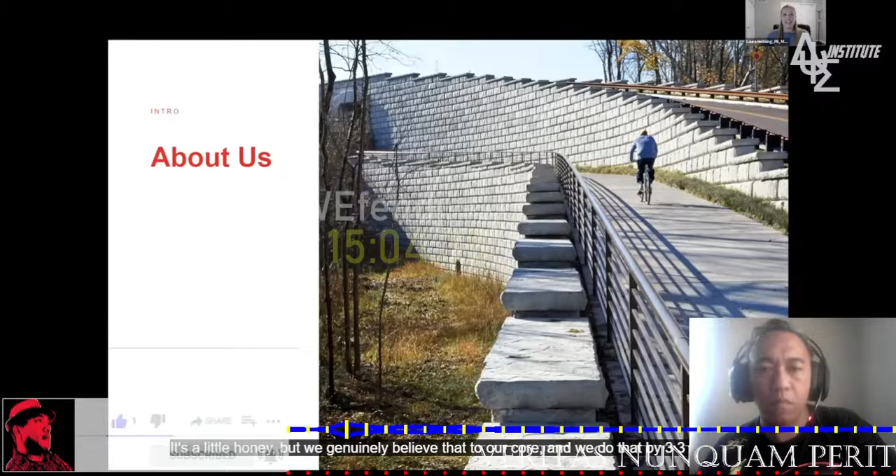About ReadyRock: our company motto is changing the world in concrete ways. It's a little punny, but we genuinely believe that to our core, and we do that in three ways. The first is taking time to care - we care about our customers, their projects, and their businesses. We lead the way by providing expert support and design resources for everyone. And we never give up by finding solutions for every project, no matter how big or small.

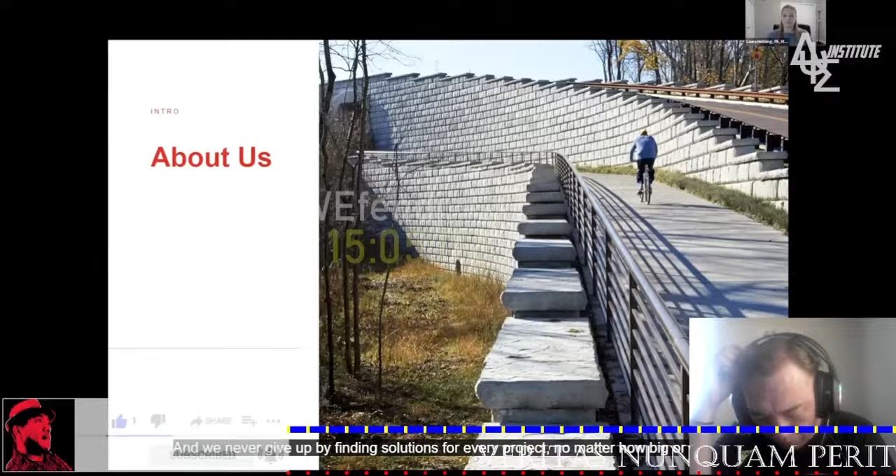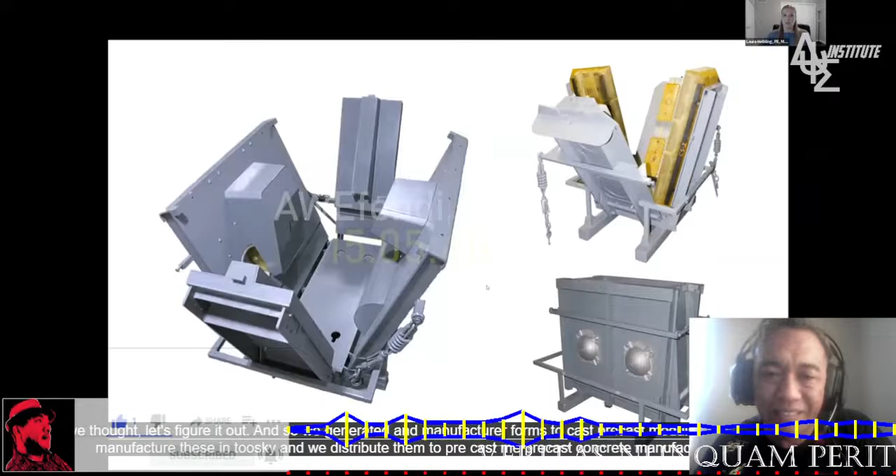We are headquartered in Petoskey, Michigan, which is pretty much as far north as you can get in Michigan before you reach the UP, and we were established in 2000. We actually started as a heavy construction company, and there was a need for retaining wall blocks, so we thought, let's figure it out. And so we generated and manufactured forms to precast modular blocks. We manufacture these in Petoskey, and we distribute them to precast concrete manufacturers around the world.

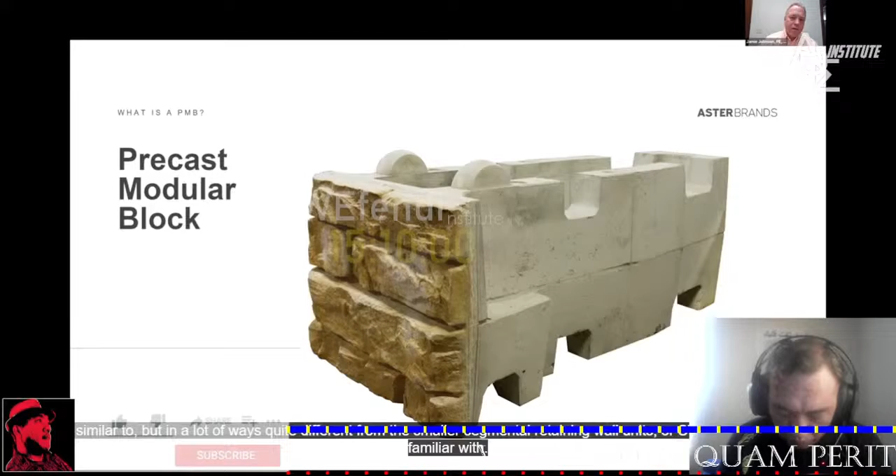Now I'll give you just a little bit of background. I'm sure there are several people on the webinar familiar with precast modular blocks, or PMBs, and there will probably be a few for whom this is one of the first times you've heard the term. What is a precast modular block? Essentially, it's a great big wet cast concrete retaining wall unit. They are similar to, but in a lot of ways quite different from, the smaller segmental retaining wall units, or SRW units, that so many folks are familiar with.

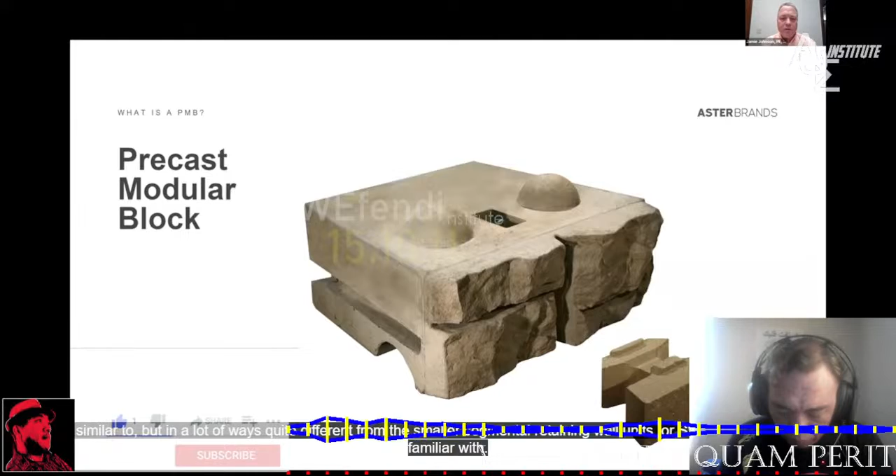There is an ASTM specification that's been out for 5 or 6 years now, ASTM C1776. It has a lot of information specifically defining what precast modular blocks are. It's a great resource and, like all the ASTM specs, a really good source of information. But what I wanted to do was highlight just some of the main features of precast modular blocks.

First, precast modular blocks are made from wet cast concrete. The distinction there is that it's a concrete mixture prepared with a high enough water-cement ratio that it has a measurable slump. This type of material is very durable, and can be a very dense concrete matrix. It's really an excellent material to make precast modular block retaining wall units - it's really well suited.

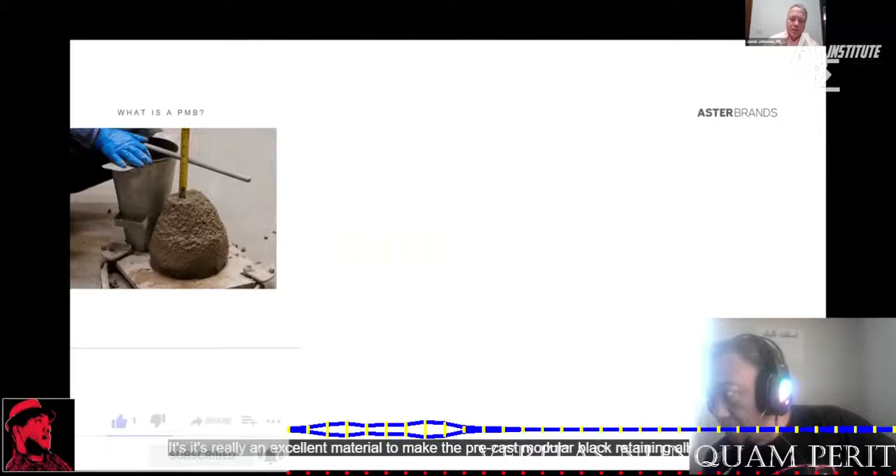One of the next distinguishing features of precast modular blocks is they're big - big, heavy concrete units. Maybe some of the baby ones would start at a couple hundred pounds, but lots of the PMB units are 2,000, 3,000, 4,000 pounds or more.

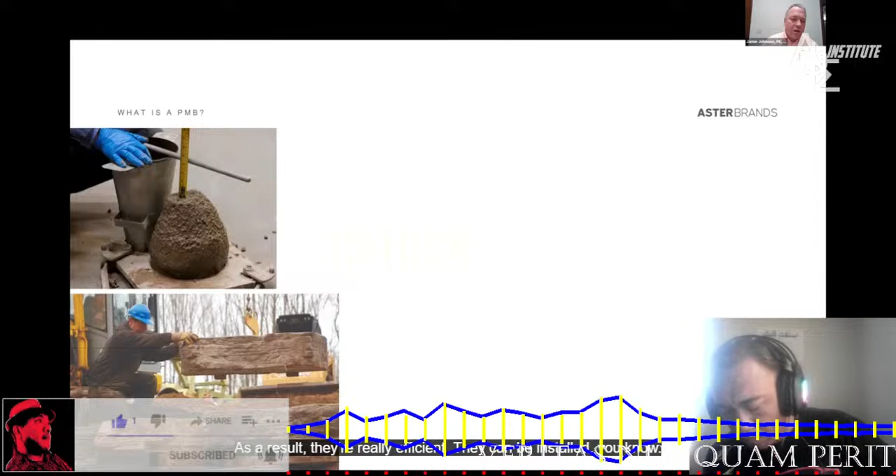They are set with heavy construction equipment and generally set with fairly small construction crews. You'll have an equipment operator, maybe a small skid steer to bring material to and from the construction area, and a foreman on the ground directing things, helping make sure people know where things go, and keeping the project moving along. As a result, they're really efficient and can be installed at fairly high production rates.

Another feature of precast modular blocks is they are precast in factory controlled conditions. One of the great benefits is that when the blocks show up at the construction site, they're ready to go in the retaining wall. You don't need to set up forms, you don't need to pour concrete on site, you don't need to wait for it to cure. Essentially, you can take the blocks right off the truck, they go into the wall, and you can start building immediately. In fact, PMBs are kind of a preferred solution for a lot of emergency repair applications because of this.

And at the end of the day, it's not a new idea. I'm sure some of you may or may not realize the stories of Solomon in the Bible - when he built the temple, all the blocks that went into production of the temple were prepared off-site. Same idea with precast modular blocks. It's kind of maybe an old idea come new again.

Another feature of precast modular blocks has to do with the size of the units and that wet cast concrete - it's really an ideal material to take a lot of great shapes. As a result, many precast modular blocks have some fairly significant face textures, maybe 4, 5, 6, 7 inches of face texture on these units, and a lot of times they're chosen specifically for their look.

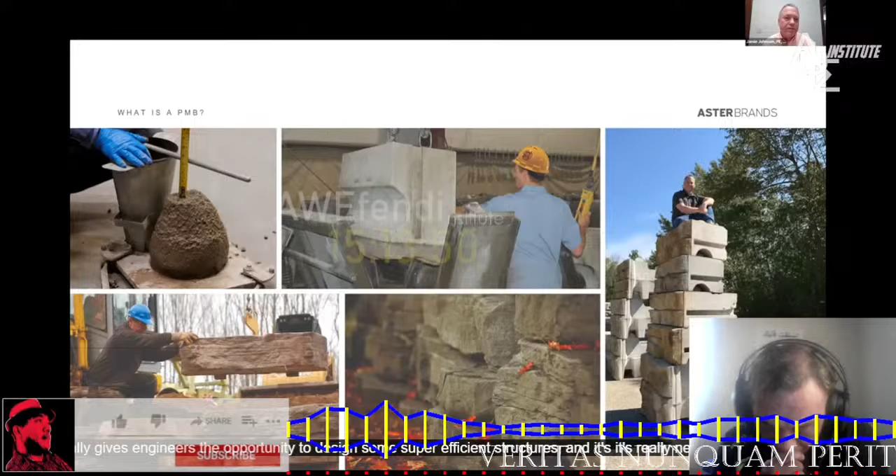One thing that's kind of unique for precast modular blocks is it's not one size, one shape, stack them up from bottom to top and that's what you've got. Precast modular blocks can come in multiple widths, multiple heights, multiple setbacks. The beauty here is it really gives engineers the opportunity to design some super efficient structures - it's really neat how they can be applied. Where are precast modular blocks used? Pretty much anywhere you need a retaining wall, there's a good chance that a precast modular block will work.

I'll show you a few pictures just to kind of give you an idea, but it really could go anywhere.

Here's a project near Vancouver in British Columbia. It was a road widening project, and precast modular blocks really fit the bill here.

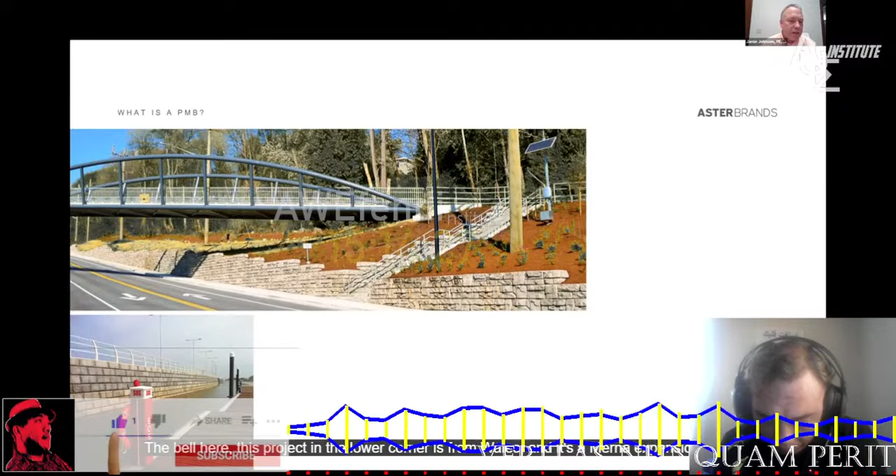This project in the lower corner is from Wales, and it's a marina expansion project. There was a river that outlets to the Atlantic Ocean, and prefabricated modular blocks were used to expand the marina.

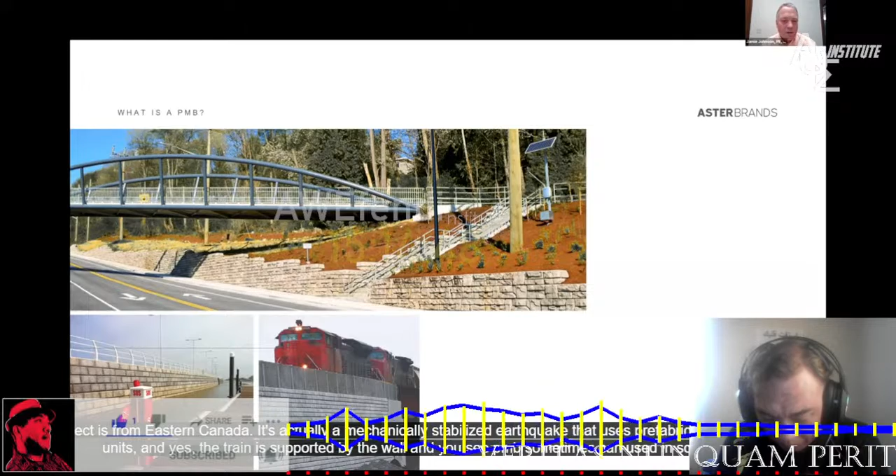This project is from Eastern Canada. It's actually a mechanically stabilized earth wall that uses prefabricated modular blocks as facing units. And yes, the train is supported by the wall. You see PMBs sometimes can be used in some very intense applications.

Here's a project from Kentucky. You can see precast modular blocks are often used in water applications, whether it's a channelization project, a detention pond, or a retention pond. They're great big concrete units that have very clearly and well-defined engineering properties, and they're really, in a lot of ways, just the ideal unit for engineers to be able to design projects in water.

Here's even one more, this one's from Missouri. We've got a parking lot on the bottom, and an upper level parking lot. This was a gravity wall constructed with PMB units. The upper rows incorporate a vehicle barrier. So really, you could see PMBs are used in a wide variety of applications.

So why did we write this book? Why are we having this webinar? Well, some of it, quite frankly, comes from my own personal experience. I've been with Redi-Rock for a long time and had the privilege and pleasure of speaking with engineers all over the world on a whole series of different types of projects.

There were some things that we've heard over and over again. One of the things is, someone would call up and say, I need a retaining wall for this project I've got here, I need someone who can design a Redi-Rock wall for me because it's a proprietary system. Every time I got that call, I kind of died a little bit inside, realizing that, quite frankly, this is kind of a general classification of retaining walls that folks with training in wall design, geotechnical and structural engineers, can easily do and do well, and can provide great solutions for their projects. It doesn't have to be considered proprietary.

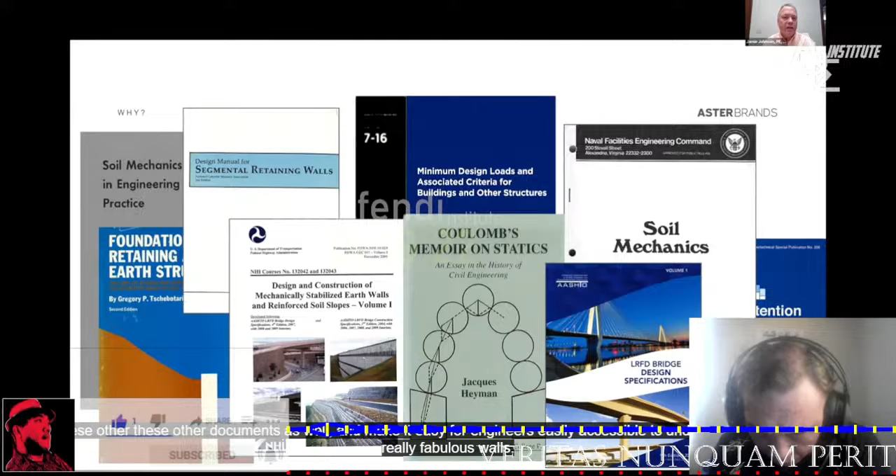What we wanted to do is bring a lot of the concepts and theories together in one location, and have references for engineers so they know where they can go find these other documents as well, and make it easily accessible for engineers to understand how to design these really fabulous walls. So that's kind of partly why we did it. What did we do? What did we put together? What did we write?

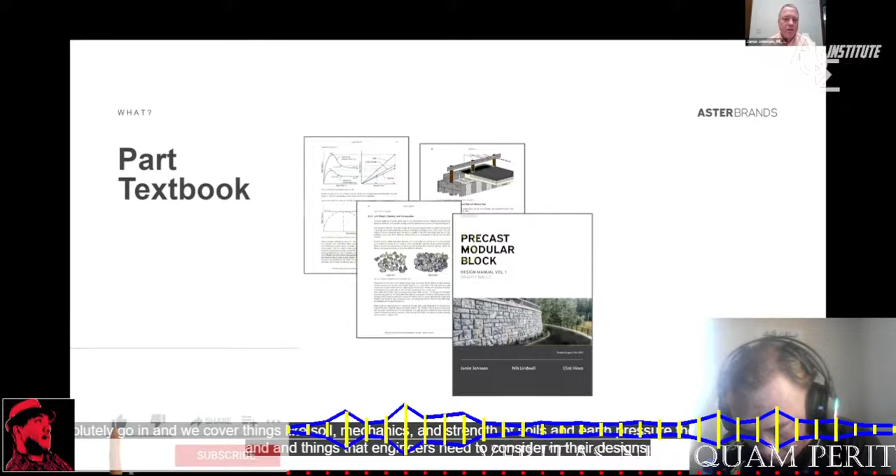Well, it's part textbook. We absolutely go in and cover things like soil mechanics, strength of soils, earth pressure theory, loads on retaining walls, and things that engineers need to consider in their designs. But we didn't stop there.

We included several examples. This book is part workbook. We took multiple different precast modular block walls, and we show step by step every calculation required from beginning to end to analyze stability of these walls, so that engineers can see how a lot of the theories are applied and how they can be used with prefabricated modular block walls.

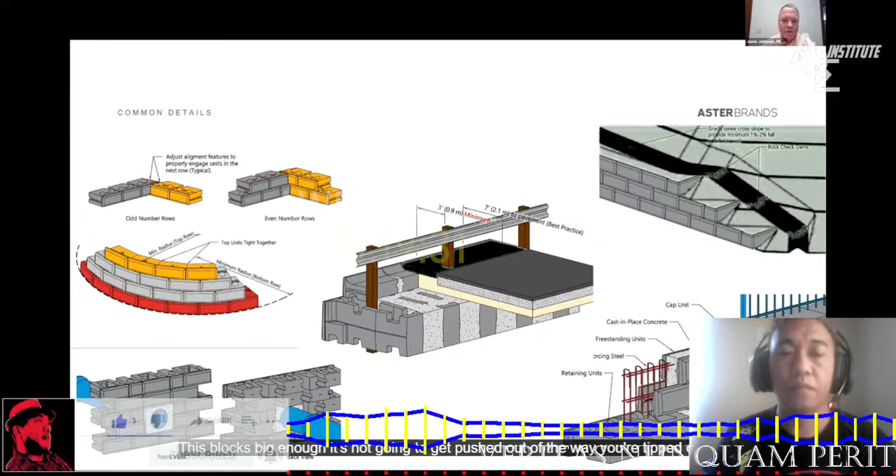But again, when it comes to a good wall design, it's much more than just saying, oh, I've got a block, this block's big enough, it's not going to get pushed out of the way or tipped over. There are all the details that go into a good engineering project that really make the difference. Things like, how do I make corners, or how do I make curves, or how do I incorporate vehicle barriers in the walls? How do I handle steps and changes in grade? What do I do about utilities? All the things, the details that really make a project special.

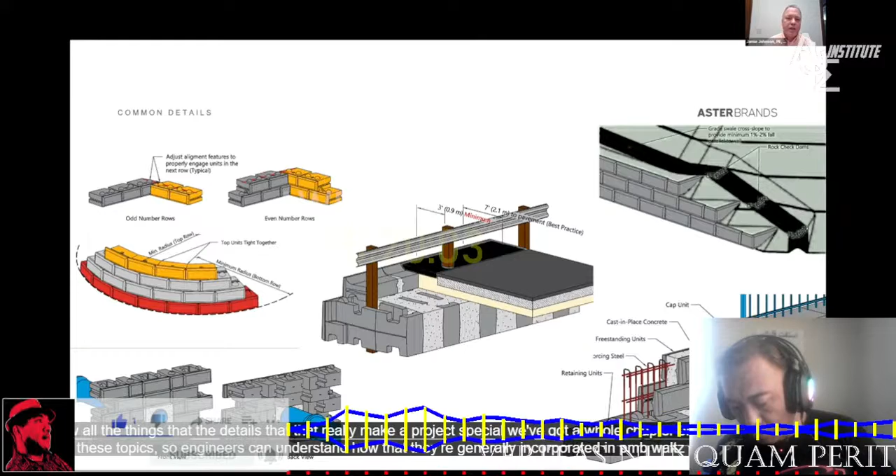We've got a whole chapter on details where we cover a lot of these topics so engineers can understand how they're generally incorporated in PMB walls. And then, we took an opportunity and put some other stuff in as well.

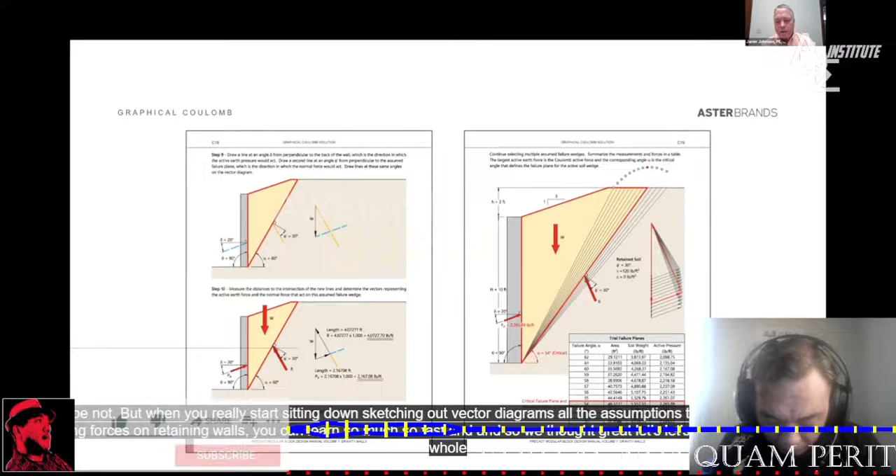We've got a whole appendix on graphical solution for Coulomb earth pressure theory. If you're in the retaining wall world, maybe you're familiar with this, maybe not. But when you really start sitting down, sketching out vector diagrams, all the assumptions that are made when we're calculating forces on retaining walls, you can learn so much so fast. And so we thought, great, let's put it in the book. So there's a whole appendix in there on a graphical Coulomb solution.

So that's sort of what we did and why we did it. Again, like I said, there's lots of places you can go to learn about retaining walls. This particular book was written specifically for prefabricated modular blocks. When you read it, you're going to see a lot of things in there that are similar, things you've seen in lots of different locations. But there are some things that are different.

And really, the differences mostly come down to the fact that you're designing great big concrete blocks. A lot of the theory is the same. The math and the equations are the same. The values that you're using are different. And this impacts everything from like calculating the ultimate bearing capacity of soils underneath the retaining wall.

When you run those calculations with a great big, say 5-6 foot wide prefabricated modular block, at the base of your wall, you're going to get a different value for the ultimate bearing capacity of that soil than you would if you were analyzing maybe a small 18-inch or 24-inch wide strip footing.

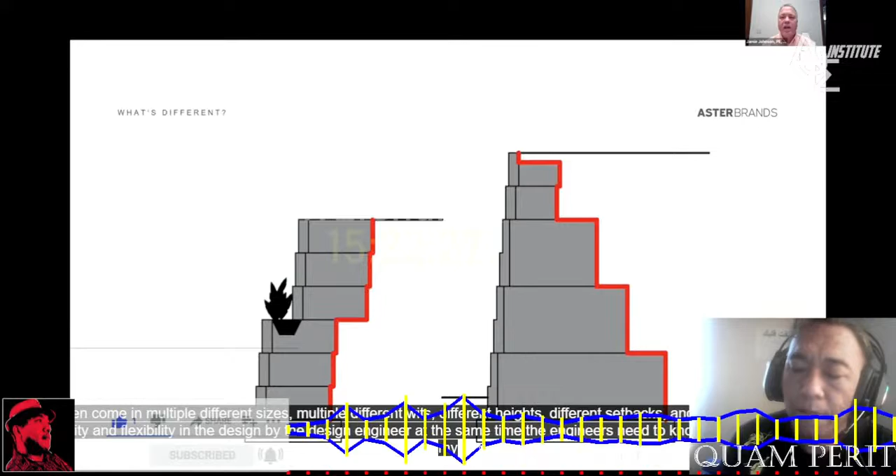There are other things as well that you're going to see. One of the things that you'll see, and like I mentioned before, with PMBs, they often come in multiple different sizes, multiple different widths, different heights, different setbacks. And this truly does allow for a lot of creativity and flexibility in the design by the design engineer. At the same time, the engineers need to know, how do I account for that in my design calculations?

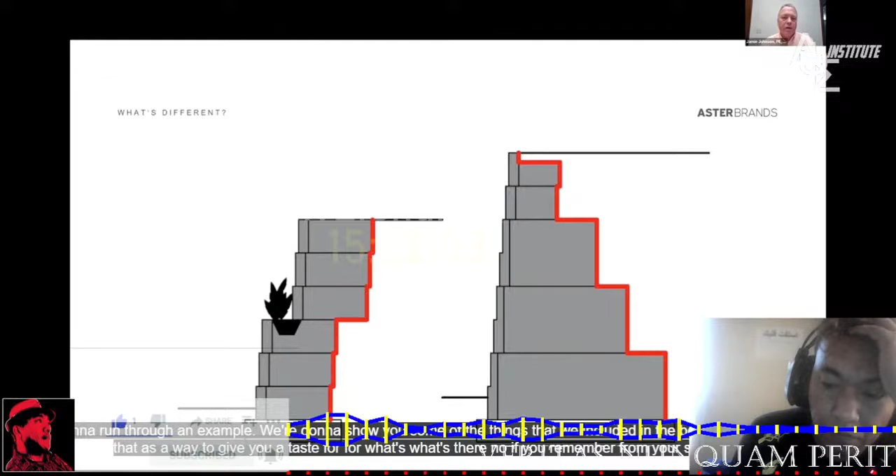What do I do and how would I define the back of wall? And so what we're going to do is we're going to actually spend some time in this webinar. We're going to run through an example. We're going to show you some of the things that we included in the book, and kind of just really use that as a way to give you a taste for what's there.

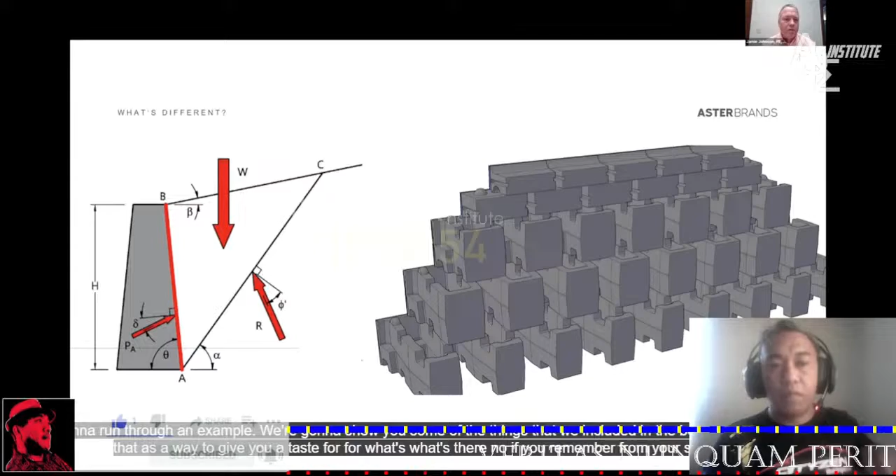Now, if you remember from your soil mechanics class, Coulomb earth pressure theory, there are a bunch of assumptions that are made. One of the assumptions that's made right from the beginning is that you have a straight line that's the back of your retaining wall. And then you also have uniform friction between the retained soil and the retaining wall itself. And this was just one of the assumptions that was made right at the beginning, and it's baked right into the formulas where we calculate active earth pressure coefficients.

Now, when you look on the right, you can see this is just maybe an example of a PMB wall. You can see different size and width units stacked up together. Now, you can certainly envision these units, the core areas and the areas in between the units, and sometimes the area behind the units are filled with stone. But you've got steps in the wall, you've got different materials. It's easy to see that the assumptions that were made for Coulomb's earth pressure calculations, they probably don't easily apply to prefabricated modular block walls.

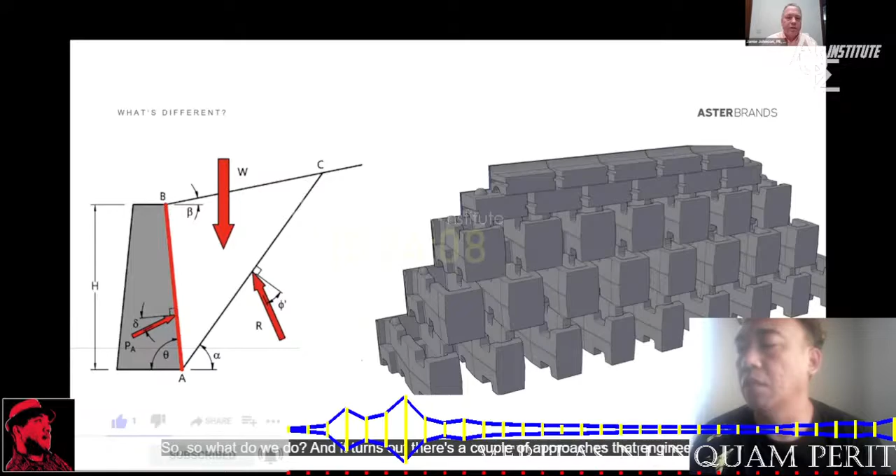So what do we do? And it turns out there's a couple approaches that engineers use. Certainly one is found in the AASHTO bridge design specifications. Truly great reference. Engineers have been relying on these specifications for decades. Really kind of just the absolute great source to go to. And they do have a section in the bridge design specifications, section 11.11, that deals with prefabricated modular walls. PMBs fall within this classification.

There's some guidance in the bridge design specifications for analyzing these types of walls. If you go into section 3 of the AASHTO specifications, where you're calculating loads on your structures, they have a figure, with commentary on how you can calculate earth pressure for prefabricated modular walls with irregular pressure surfaces, like we would have with different width units in the same cross section.

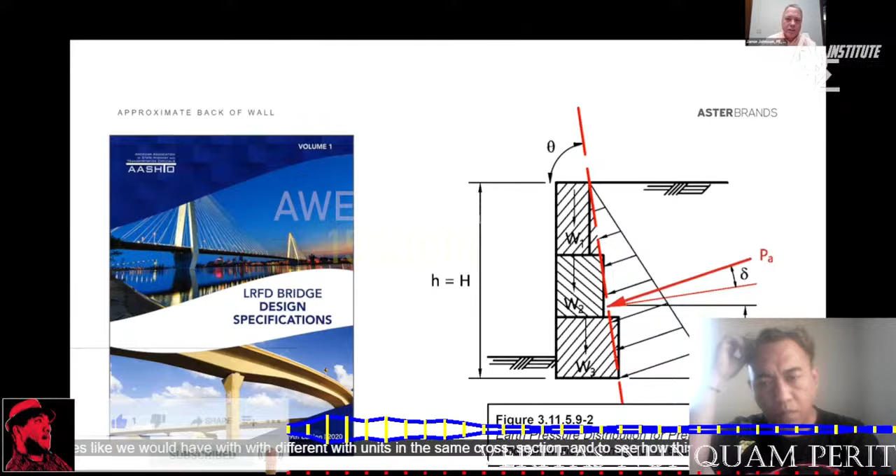To see how this would apply to PMB walls, we can start with a sketch, and this might just be an example of a wall that you would see.

The approach presented in the AASHTO specifications is you're going to draw a line, an approximate line to represent the back of the retaining wall. You start at the bottom back corner of your lowest PMB unit, and draw a straight line up to the top back corner of the uppermost PMB unit. You can see the red dashed line here, and we can assume that's going to be a good approximation of an average back of wall.

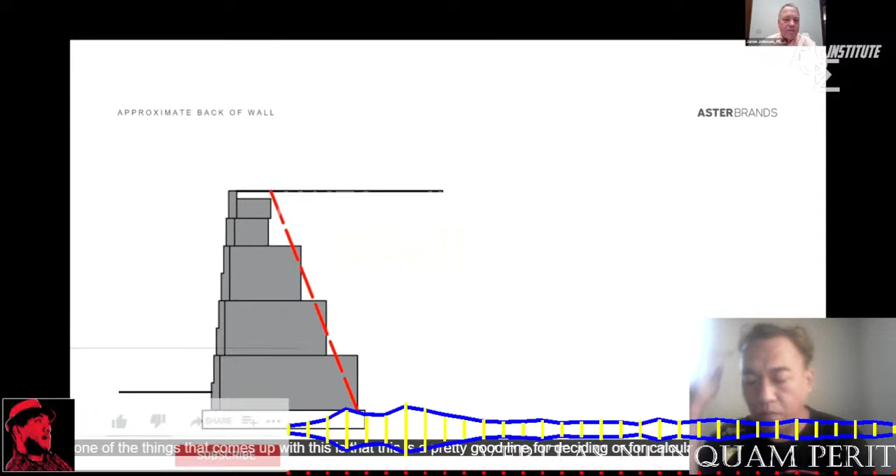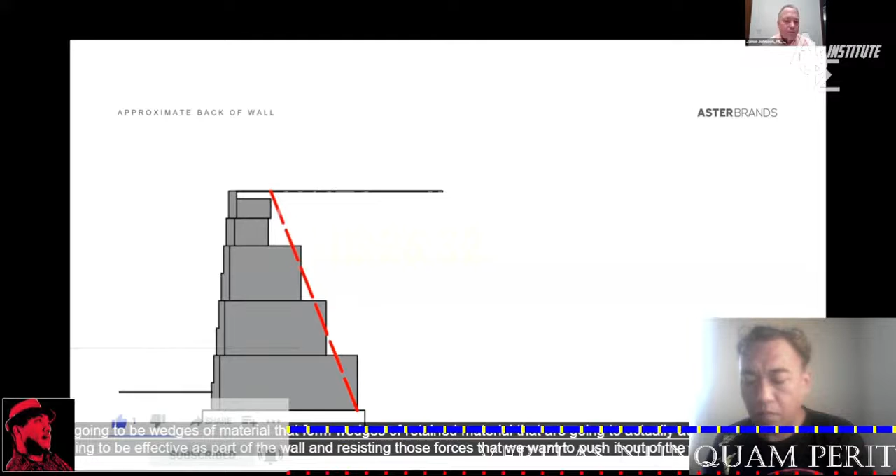This is a pretty good line for calculating pressure on the wall, but we've got stepped units, and we're pretty sure that when earth pressure is acting on it, wanting to push it out of the way or tip it over, there will be wedges of retained material that actually act with the PMB units and are effective as part of the wall in resisting those forces.

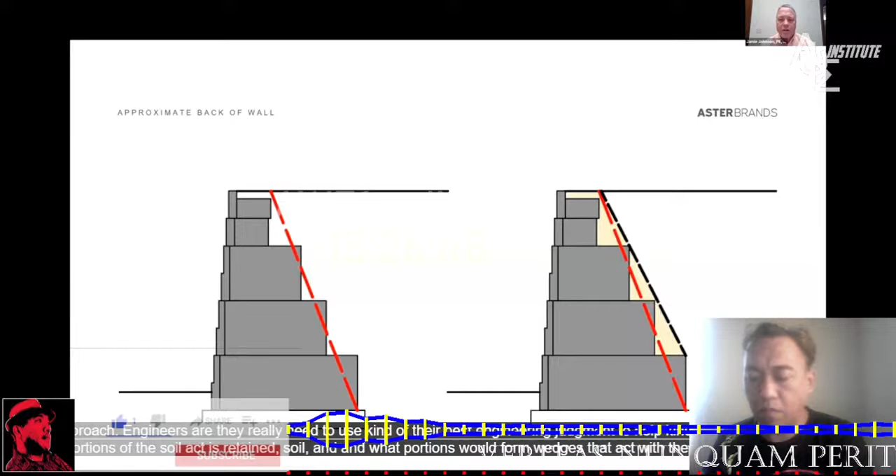With this approach, engineers really need to use their best engineering judgment to draw lines signifying what portions of the soil act as retained soil and what portions would form wedges that act with the PMB units.

So that's one approach that's taken. It certainly gets easier with time, and as you get more familiar with these systems, those engineering judgments become easier to make. But that's not the only approach that engineers use, and that's not the only thing that we put in the book. We also included another approach.

It's found in some German design standards, DIN 4085, just a fabulous reference. About the only negative is it's written all in German. I couldn't find an English translation, and I don't speak German. But Google Translate is amazing, and between that and the diagrams, there's just a treasure of engineering theory in this specification.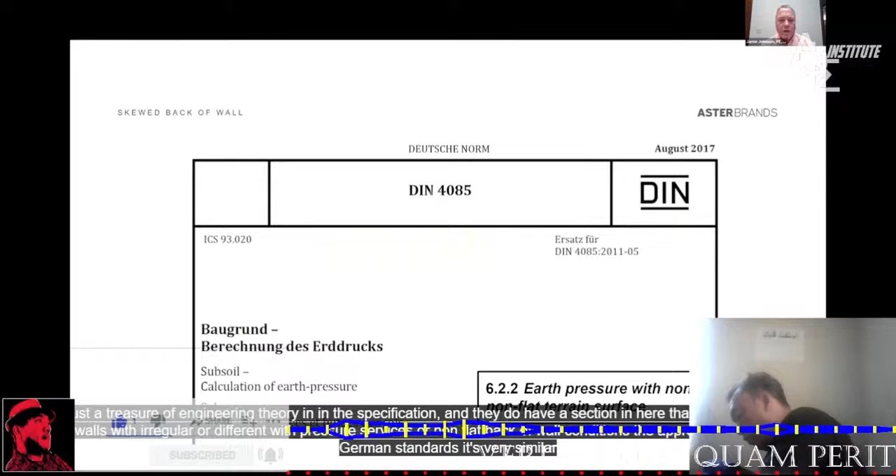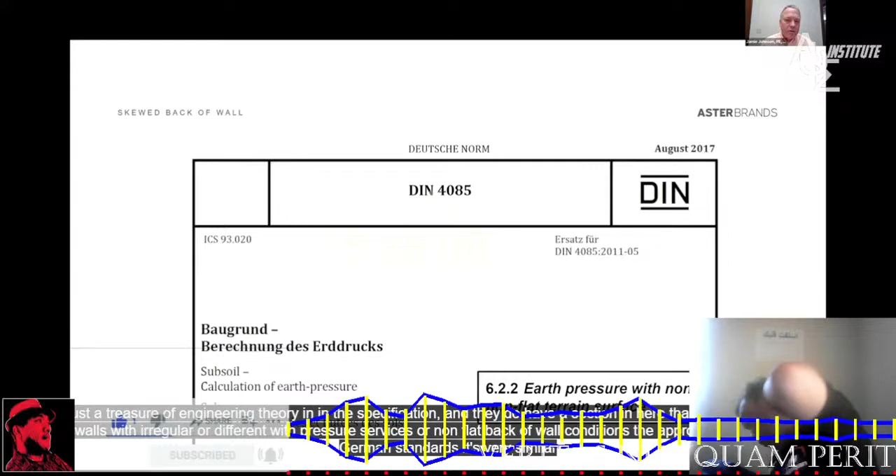They do have a section that deals with earth pressure on PMB walls with irregular or different width pressure surfaces or non-flat back of wall conditions. The approach in these German standards is very similar to the approach most engineers use when dealing with layered or stratified soils when calculating forces on retaining walls. In this case, instead of different layers in the soil, we've got different back of wall conditions.

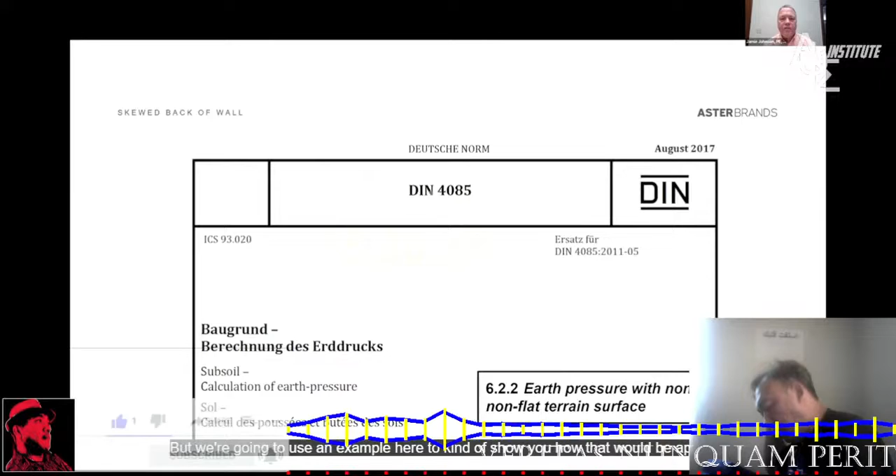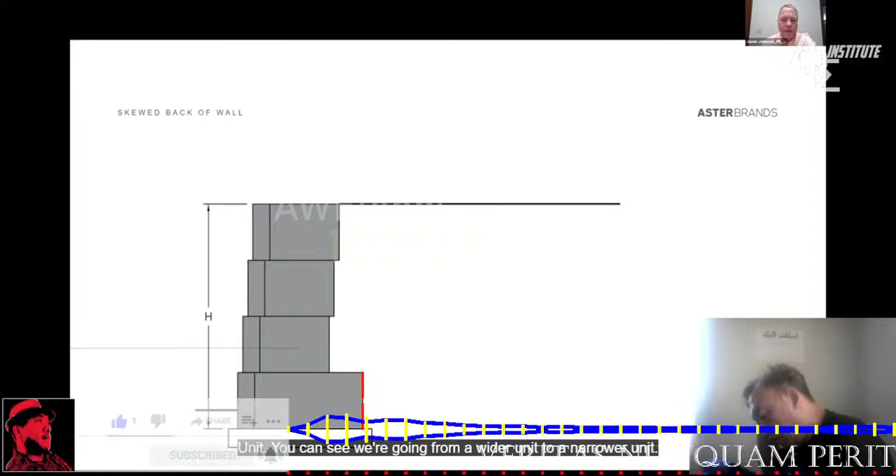Once we get to the top of that lowest PMB unit, you can see we're going from a wider unit to a narrower unit. Again, this is where we would expect the soil wedge to form. That soil wedge is going to be very similar to what we calculate in cantilever retaining walls that have a long heel.

You can calculate the failure angle that would form, separating kind of a wedge that acts with the retaining wall from the retained soils. And so we get this second area that follows the back of a wedge of retained soil.

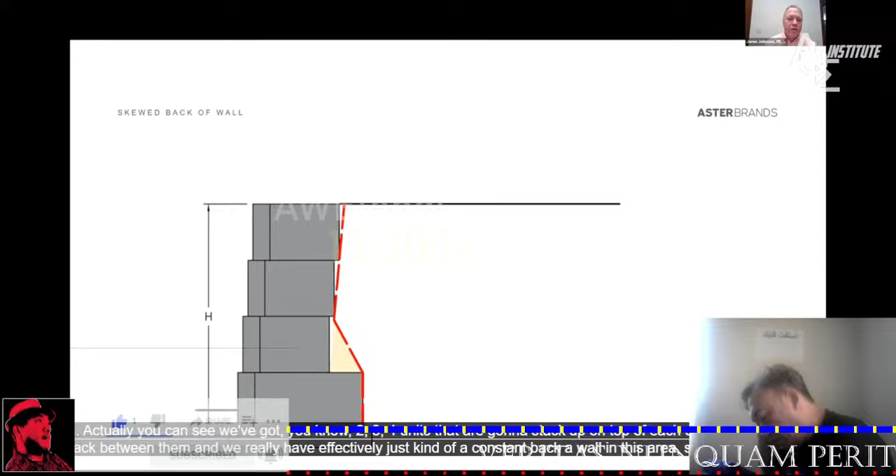Once it gets to the back of the units, you can see we've got 2, 3, 4 units that are going to stack up on top of each other. They've got a real small setback between them, so we effectively just have a constant back of wall in this area, similar to what you'd have with maybe an SRW wall.

So what we ended up with is 3 different zones. We've got zone 1 that follows that sort of constant back of wall area at the top. Zone 2 that follows the wedge that would form between the wall and the retained soils, and zone 3, which follows that lowest PMB unit.

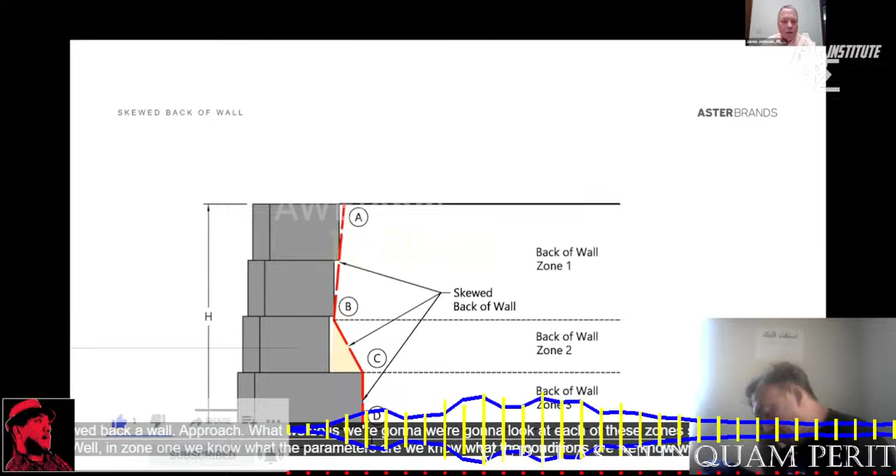Now with the skewed back of wall approach, what we do is we're gonna look at each of these zones separately. In zone 1, we know what the parameters are, we know what the conditions are, we know what the back of wall angle is, and we know what the friction between the retained soil and the back of wall is. We can calculate an active earth pressure coefficient.

And if the entire wall were just like zone 1, we would calculate the vertical pressure in the soil. It's just the unit weight of our soil times the depth. Then we would multiply that vertical pressure by an active earth pressure coefficient, and we could get a triangular shaped pressure diagram that the active earth pressure would be acting on the retaining wall.

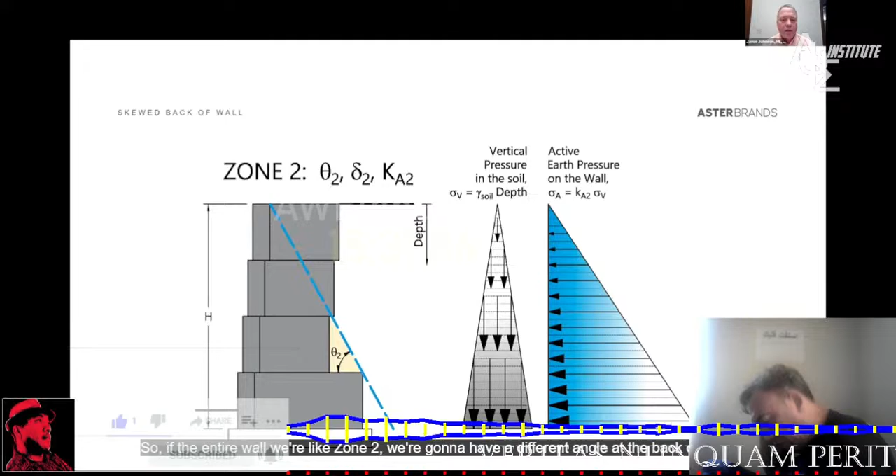Well, we've done that for zone 1. What we do with the skewed back of wall is we just do that for the other zones as well. So if the entire wall were like zone 2, we're going to have a different angle at the back of the wall, and probably some different angle of friction between the retaining wall and the retained soil, where you would calculate a different active earth pressure coefficient.

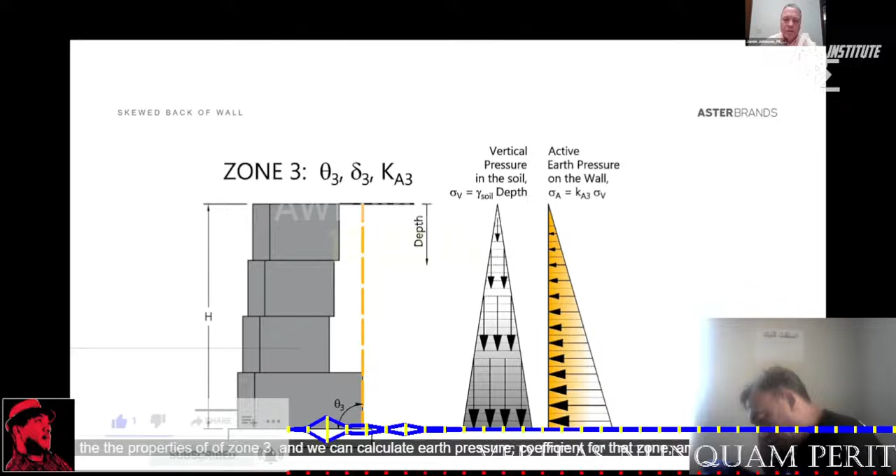And we're going to have the same vertical pressure diagram, again just the unit weight times the depth. But when we use the active earth pressure coefficient from zone 2, we get a different pressure diagram. Then we do the same thing for zone 3, again use the properties of zone 3, calculate an earth pressure coefficient for that zone, and graph what the pressure diagram would look like.

Now, with the skewed back of wall approach, we basically take the area of the pressure diagram from zone 1 and apply that in zone 1. We take the portion of the pressure diagram from zone 2 and apply that in zone 2. And we take the portion from zone 3 and apply that in zone 3. Again, almost exactly the same approach that we use when looking at stratified or layered soils.

There's a great FHWA document, I think it's 071, that has the stratified soils approach in it. If you open that reference up, you're going to find a very similar approach where they'll create a theoretical or composite active earth pressure diagram. Once we have this composite diagram, all we need is the area of that diagram, which is really going to be the force that acts on the retaining wall.

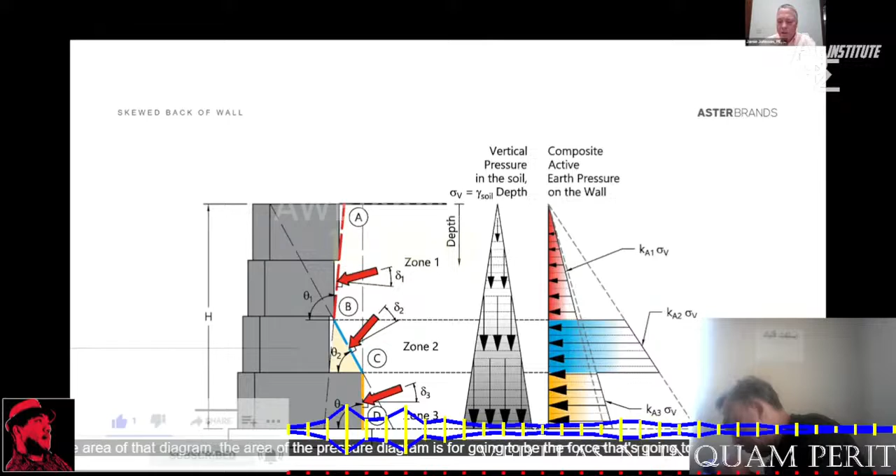Like I said, the book is half theory, half textbook, and half examples. There's an example in the book of how to apply the skewed back of wall approach.

And we're going to go through it in this webinar, step by step.

I'm going to warn you right from the start - fans of Douglas Adams, Hitchhiker's Guide to the Galaxy, recognize this warning: don't panic. There's a lot of math. It's going to go really fast. You absolutely will not be able to follow every calculation. Please don't try.

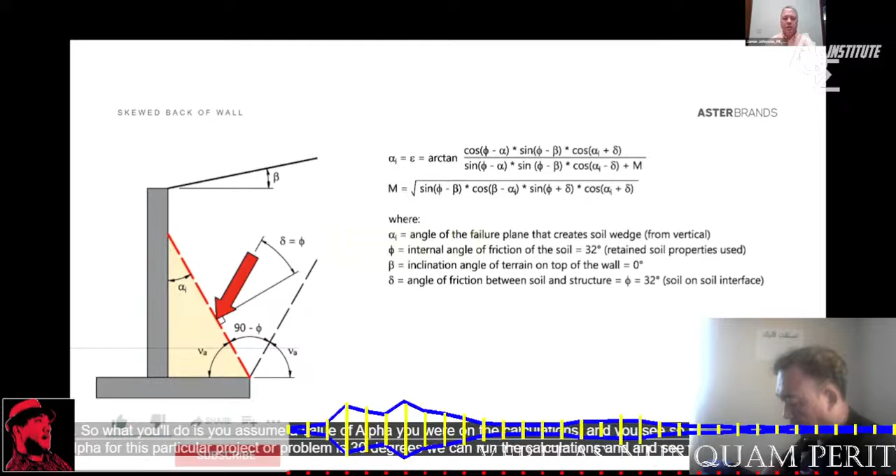With the different types of soils, we can actually calculate what the angle of the wedge would be that forms as we're stepping from wider units to narrower units. There are formulas available in the book, and you can find them in other references as well. This particular approach is an iterative type solution, so you assume a value of alpha, run the calculations, and see.

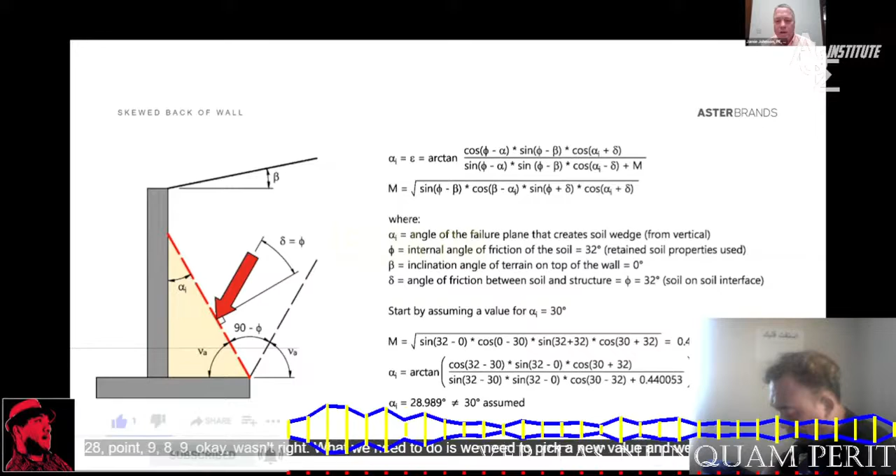If we started by assuming the angle alpha for this problem is 30 degrees, we run the calculations and calculate a value of alpha of 28.989. That wasn't right, so we pick a new value and iterate. In this case, we assume 29 degrees, run the calculations, and it comes back calculating the same value of alpha of 29 degrees.

Through this iterative process, we've calculated the angle of the wedge that would form in the soil, separating soil that acts with the retaining wall from retained soil. Measured from vertical, it's 29 degrees. If you wanted to measure it from horizontal instead, it's just 90 minus alpha, which is 61 degrees.

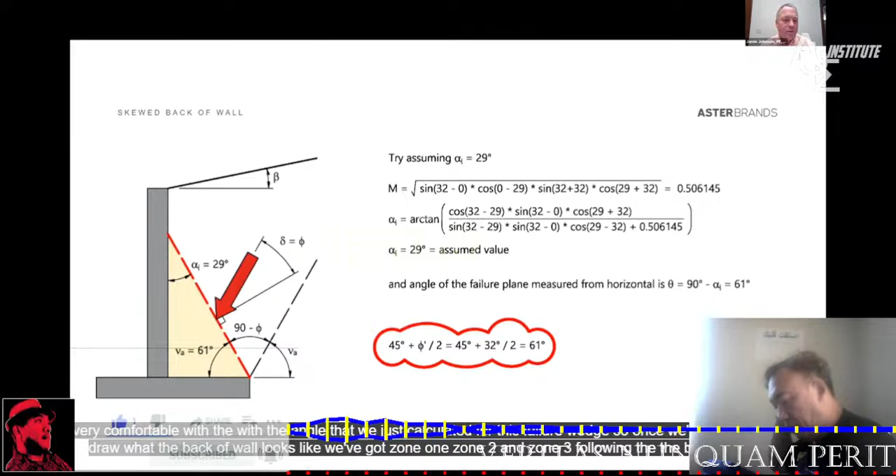Now, the geotechs in here, especially the ones that really understand Mohr circle, they're going to be thinking, hey, 61, that's interesting. 45 plus phi over 2 just happens to be 61 degrees. They're very comfortable with the angle we just calculated for this failure wedge.

Once we've done that, we can actually draw what the back of wall looks like. We've got zone 1, zone 2, and zone 3 following the back of wall, the angle that follows the back of that wedge of material, and then the lowest PMB unit.

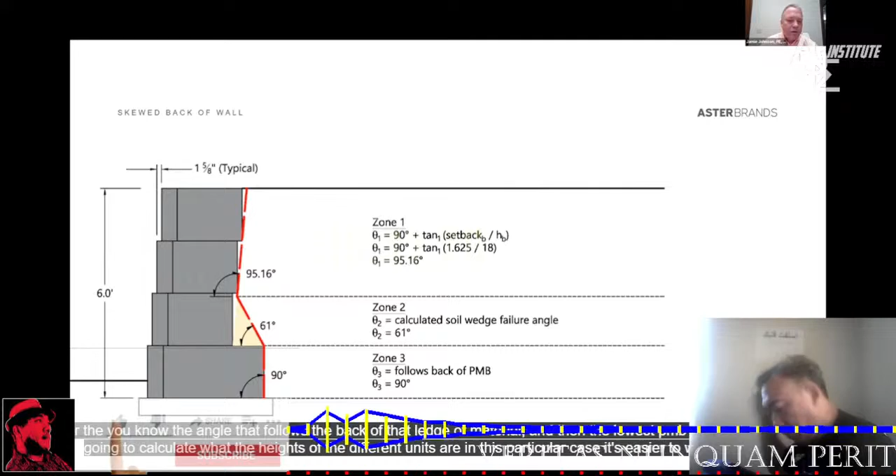The next step is to calculate the heights of the different units. In this case, it's easier to work from bottom to top, so that's what we'll do. The bottom zone follows just that lowest PMB unit, and it's 18 inches high. When we get to the middle zone, zone 2...

...it's a little bit of math required, but basically we're solving the triangle, right? We're calculating the height of the triangle defined by the failure wedge that forms and the angle of the back of the wall. We do a little bit of trigonometry and calculate that zone is 16.87 inches high for this example.

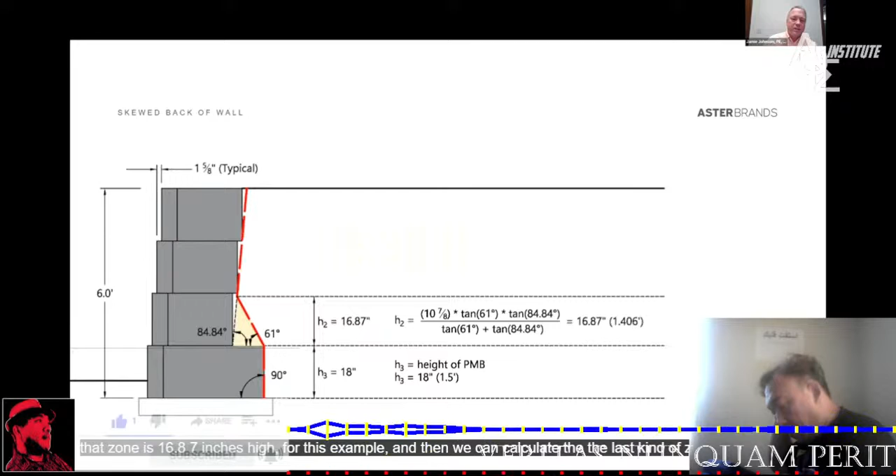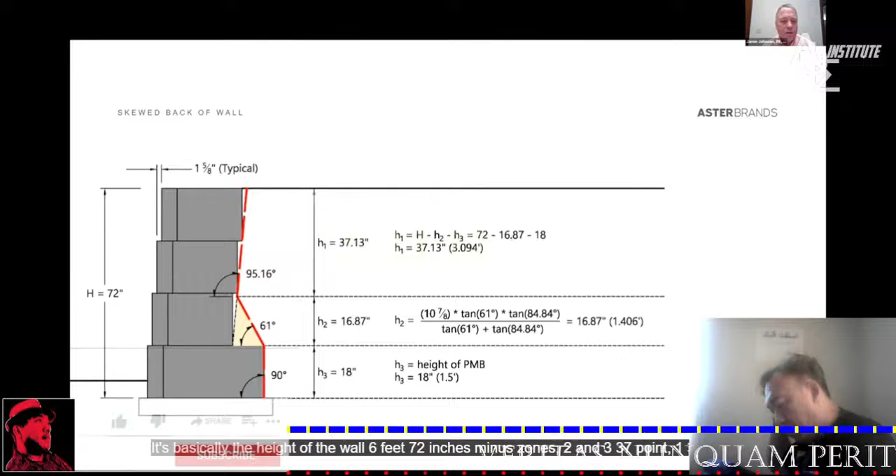Then we can calculate the last zone, zone 1, at the top. It's basically the height of the wall, 6 feet or 72 inches, minus zones 2 and 3, which is 37.13 inches. So we really are starting to define all the different areas.

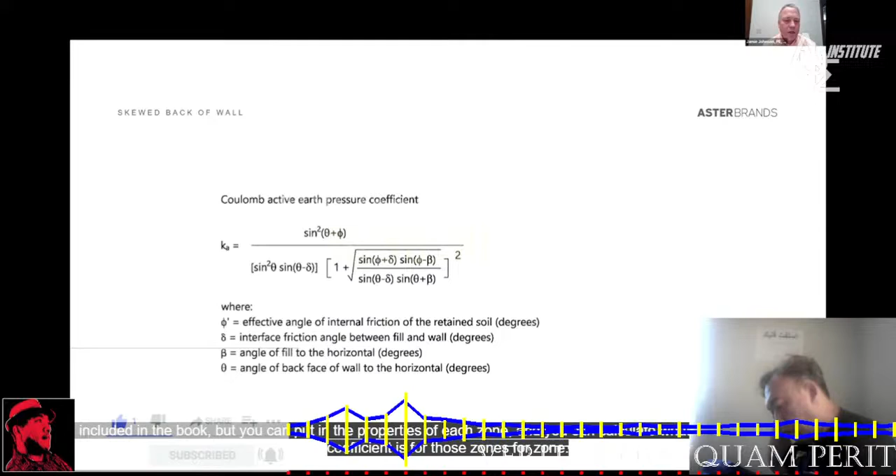The next thing we want to do is calculate an active earth pressure coefficient for each of the different zones. This is the formula you see just about anywhere - any soil mechanics text will have Coulomb active earth pressure coefficients and formulas for them, also included in the book. You can put in the properties of each zone and calculate the active earth pressure coefficient for those zones.

For zone 1, once we put in the friction angle of the soil and the delta angle, the angle of friction between the retained soil and the wall, and put in the angle of the back of the wall, we calculated an active earth pressure coefficient of 0.24.

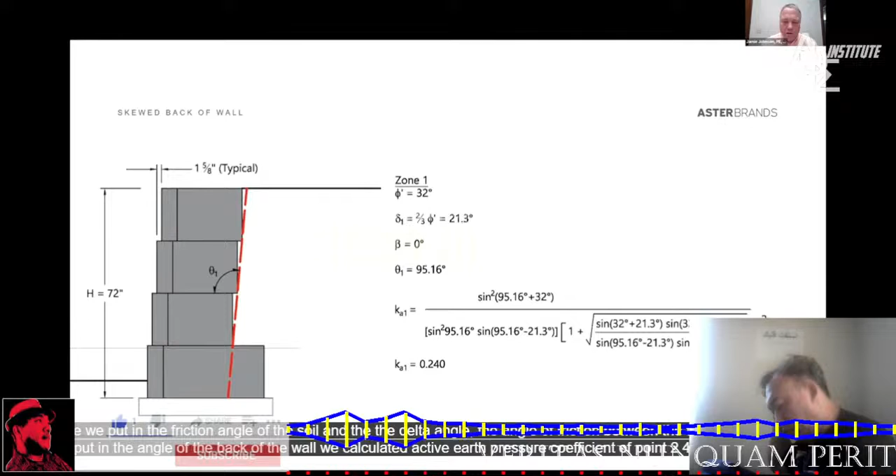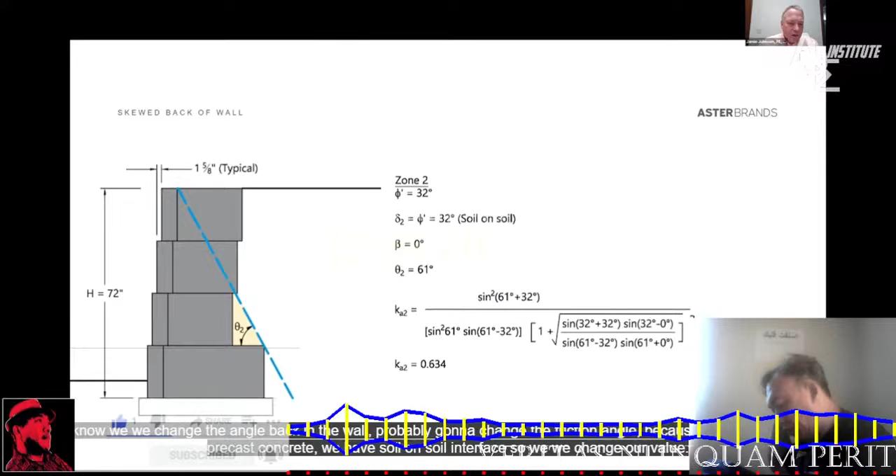If we looked at zone 2, we changed the angle of the back of the wall, which changes the friction angle because instead of retained soil on precast concrete, we have soil on soil interface. So we change our value of delta. We can calculate a new active earth pressure coefficient. For zone 2, it's 0.634. We do the same thing for zone 3, 0.275.

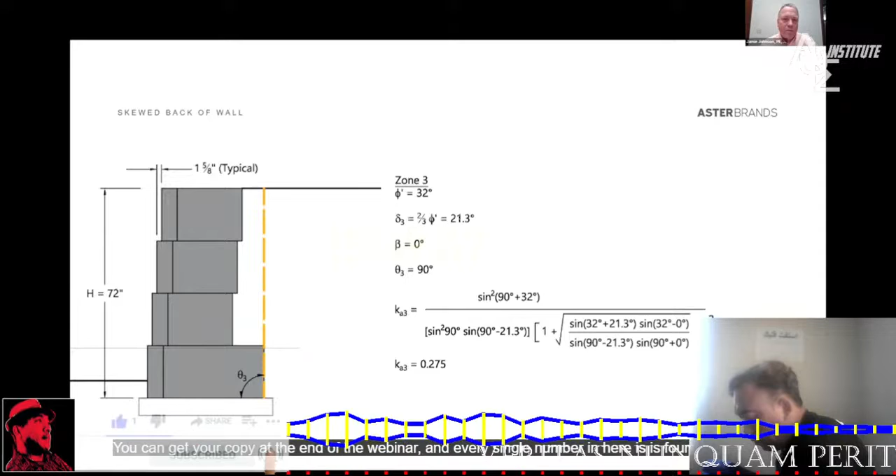Again, I'll remind everyone, don't worry about running all the numbers. It's in the book. You can get your copy at the end of the webinar, and every single number in here is found in that book.

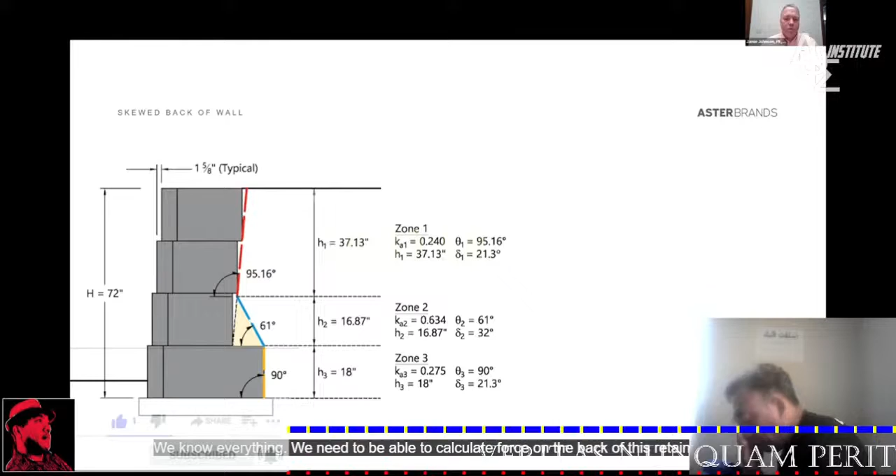So now we've got all the zones defined. We know what the heights are. We know what the earth pressure coefficients are. We know everything we need to be able to calculate force on the back of this retaining wall. So we start with zone 1.

Just like any type of retaining wall design, we're going to calculate vertical pressure in the soil, unit weight of the soil times the depth. Then when we multiply that vertical soil pressure by our active earth pressure coefficient, we can get the active earth pressure diagram that represents the active earth pressure acting on the wall.

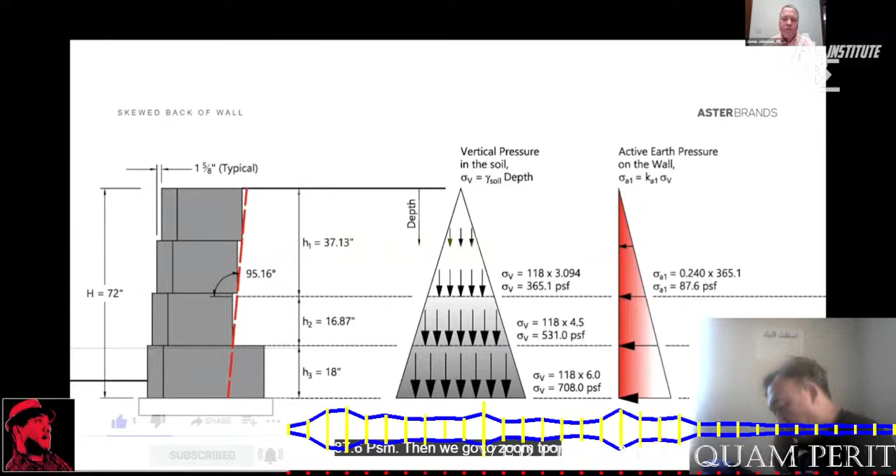Then we actually want to calculate some values at some strategic locations. For zone 1, we want to know the top of zone 1, the top of the wall - there's no pressure, no retained earth. At the bottom of zone 1, we can calculate the value of the pressure on the wall, 87.6 PSF. Then we go to zone 2, same thing.

Vertical pressure in the soil stays the same - it's the unit weight times the depth. We're using the active earth pressure coefficient for zone 2. And then we'll do the same thing for zone 3, and we can figure out what those values are at the top and bottom of zone 3.

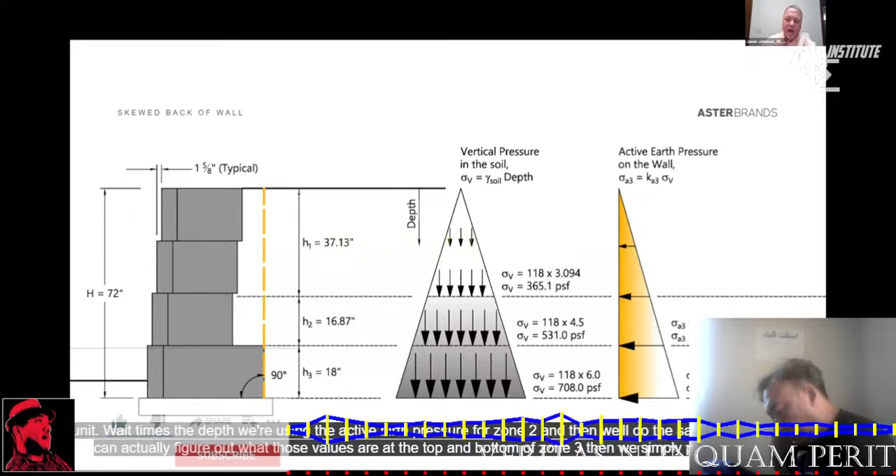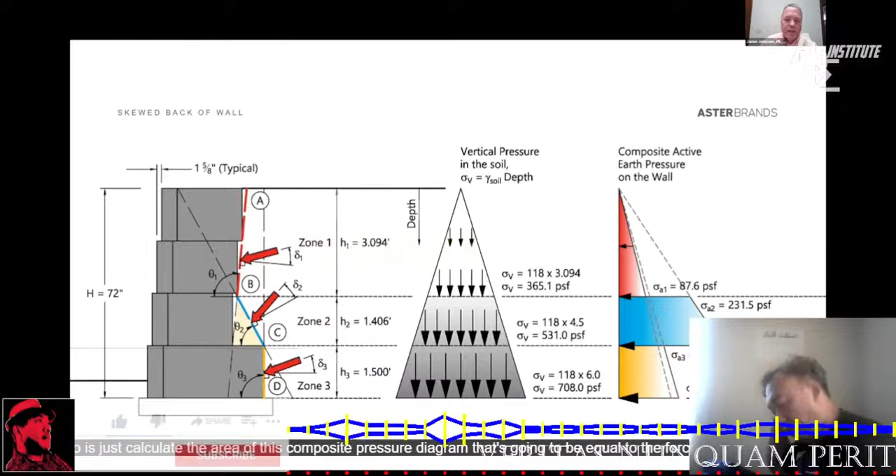Then we simply put them together. We get our composite active earth pressure diagram - the portion of the pressure diagram from zone 1 in zone 1, the portion from zone 2 in zone 2, and the portion from zone 3 in zone 3. What we need to do is just calculate the area of this composite pressure diagram. That's going to be equal to the force on the retaining wall.

So we run the numbers. Zone 1, we're really looking at that red shaded portion of the pressure diagram in zone 1. We want to know what the area of that triangle is, 1/2 base times height. No problem, we can do it.

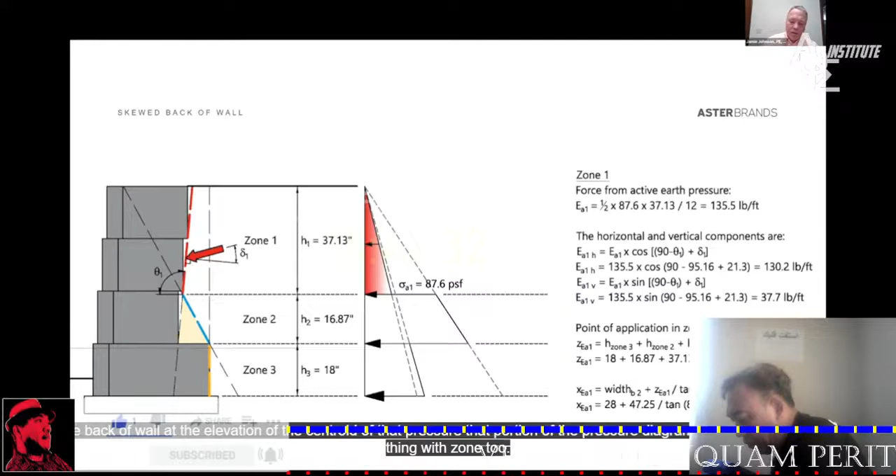Then the other thing we need to take into account is that in Coulomb earth pressure theory, we assume the force is acting at an angle delta from perpendicular to the back of the wall. So we can take that earth pressure force and break it into horizontal and vertical components, using a little trigonometry and the angles we've already determined. Furthermore, we can figure out a point of application for the force from zone 1 - it's the back of wall at the elevation of the centroid of that portion of the pressure diagram. We can do the same thing with zone 2.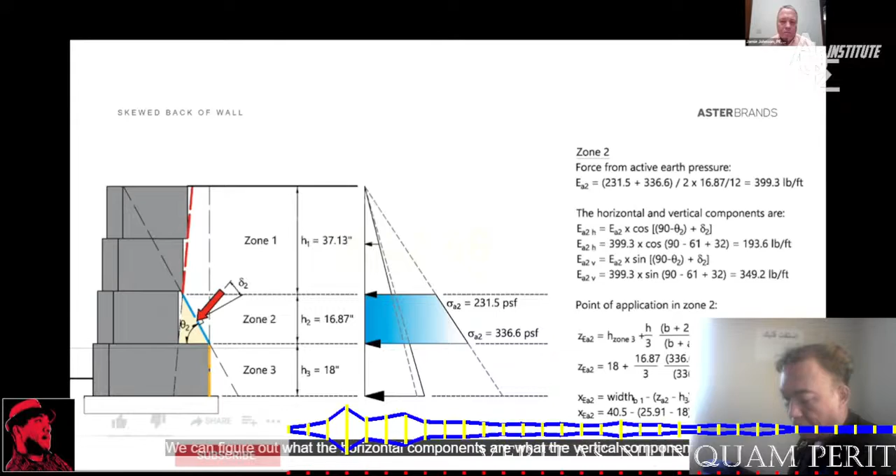The only difference here is instead of a triangle, it's a trapezoid. But again, we're good at math - trapezoids don't scare us. We can calculate the area of a trapezoid, and then break it down into horizontal and vertical components. We can also calculate where that acts on the back of the retaining wall. And then we do the same thing for zone 3.

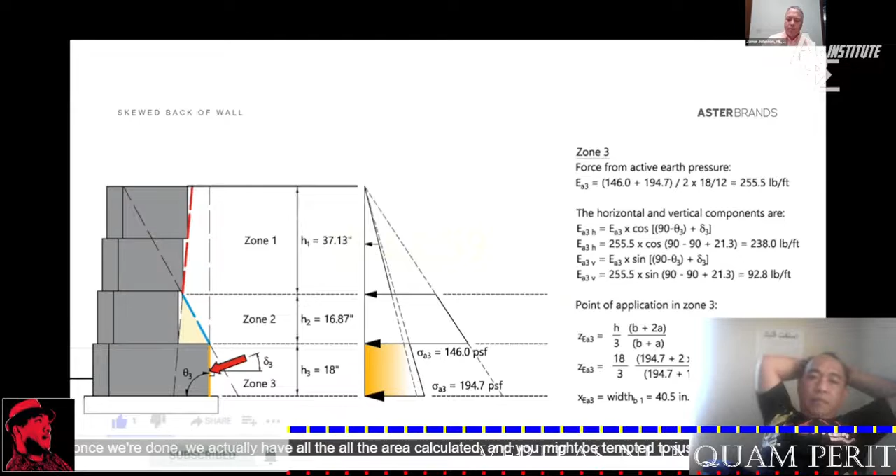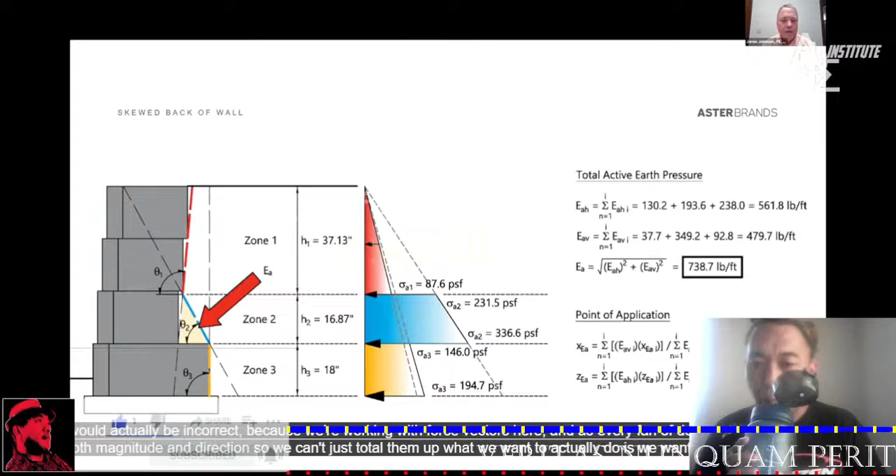Now, once we're done, we actually have all the area calculated. And you might be tempted to just add up the force from zone 1 plus the force from zone 2 plus the force from zone 3. That would actually be incorrect because we're working with force vectors here. And as every fan of Despicable Me knows, vectors have both magnitude and direction. So we can't just total them up.

What we want to actually do is total up all the horizontal components together, and total up all the vertical components together. Then we're going to solve for the hypotenuse of a triangle - the square root of all the horizontal components squared plus all the vertical components squared. We're going to calculate our active earth pressure for this particular retaining wall. We can also calculate where a theoretical point of application is - it's just a weighted, like a weighted gravity calculation.

We multiply the different horizontal and vertical components by the areas where they act. It's a weighted calculation, and we can figure out a location for the overall resultant force on this retaining wall. For this particular case, it acts at elevation 23.5 inches. This was a 6-foot high wall, so it's just under a third of the way up the wall, and it acts back near the back of that soil wedge.

So, like I say, PMB walls are pretty neat. They offer a lot of tools for engineers. Actually, there were 2 approaches to calculate earth pressure on the retaining wall that we just showed here.

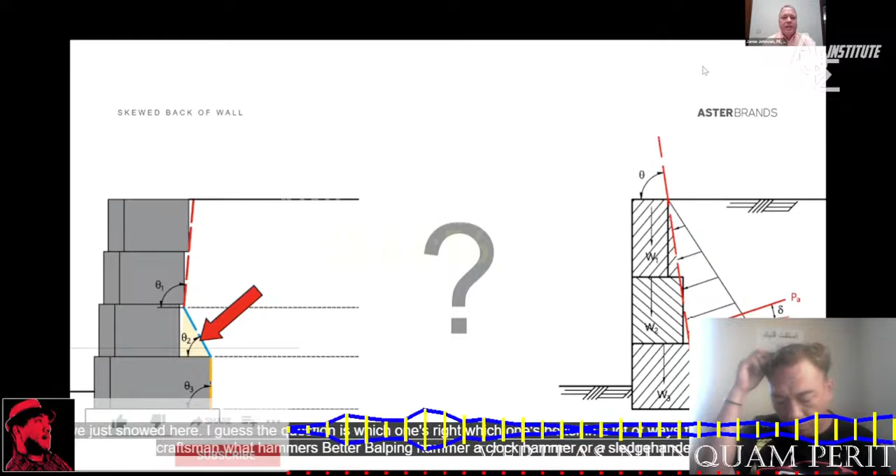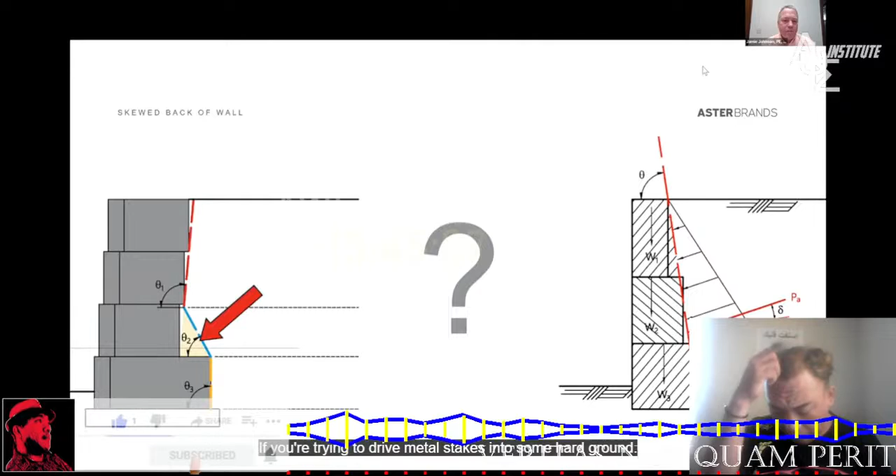I guess the question is, which one's right? Which one's better? In a lot of ways, that's sort of like asking a craftsman, what hammer's better, a ball peen hammer, a claw hammer, or a sledgehammer? And of course, it's going to depend on what you're trying to do. If you're trying to drive metal stakes into hard ground, I really don't want to use a ball peen hammer. I want a nice sledgehammer.

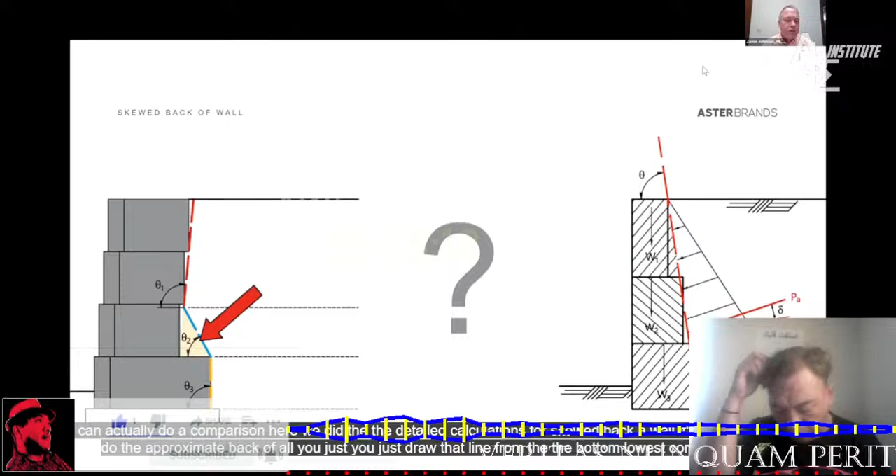So again, what you want is the right tool for what you're trying to do. Now we can actually do a comparison here. We did the detailed calculations for skewed back of wall. It's a very simple calculation to do the approximate back of wall.

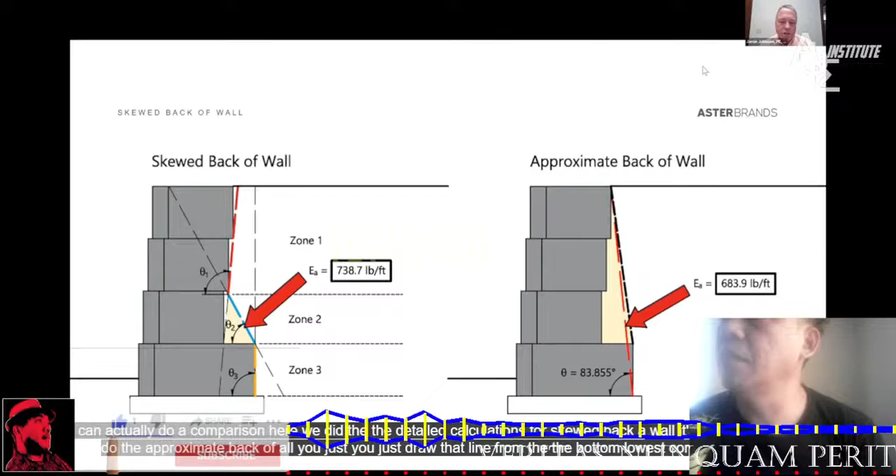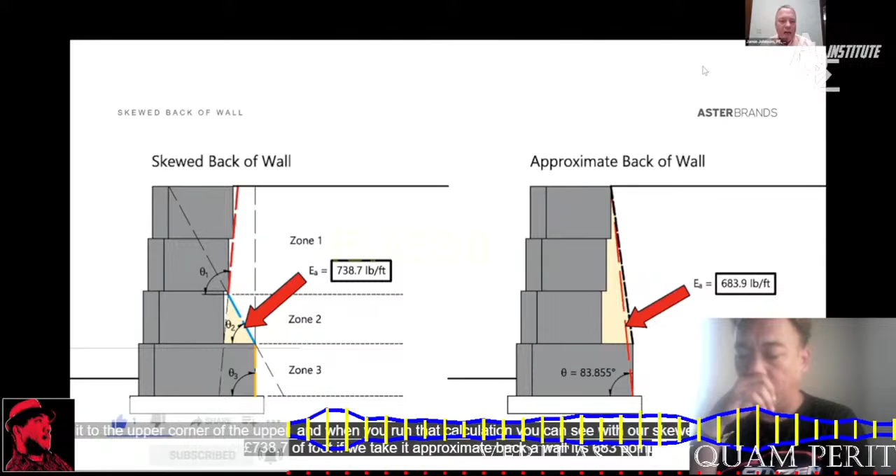You just draw that line from the bottom lowest corner of the lowest PMB unit to the upper corner of the upper unit. When you run that calculation, with our skewed back of wall, we calculated 738.7 pounds a foot. If we take an approximate back of wall, it's 683.9. The skewed back of wall has a little bit more vertical component to the way the force acts; the approximate back of wall, not quite as much vertical component.

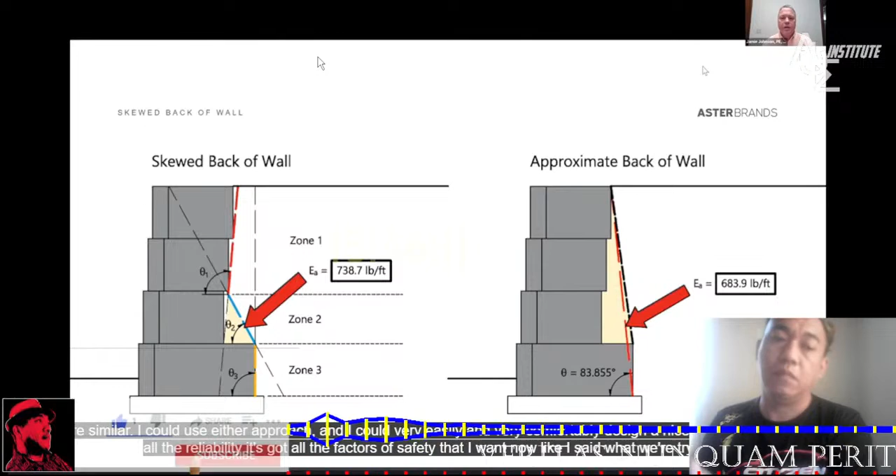They're different, but they're similar. I could use either approach, and I could very easily and very comfortably design a nice PMB retaining wall that's got all the reliability, all the factors of safety that I want.

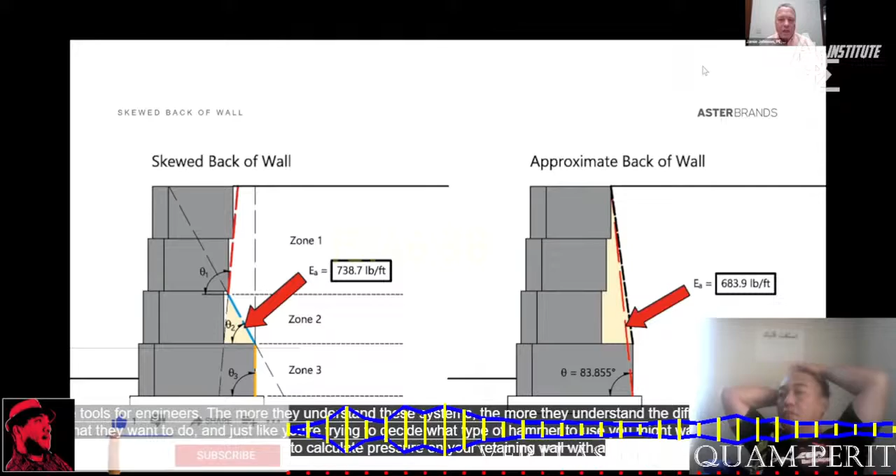Now, like I said, what we're trying to do is provide tools for engineers. The more they understand these systems, the more they understand the different tools, the more they can decide what they want to do. Just like deciding what type of hammer to use, you might want to use a different approach to calculate pressure on your retaining wall depending on what you're doing. If you want a quick calculation, you're just trying to run some numbers and wrap your head around a solution, see what you think is going to work.

The approximate back of wall is pretty easy. You can do it on a napkin. There's not a whole lot to it. As you saw, going through step by step, the skewed back of wall is a little more complicated. However, it's extremely well suited for computer solution. There are programs out there, like the Go5 retaining wall software, that have this method included.

So you might choose one, you might choose the other. It's also a trade-off, right? With the approximate back of wall, I'm going to have to make some engineering judgments as to what kind of soil I want to consider acting with the retaining wall, because it's not as clearly defined. With the skewed back of wall approach, I calculated a failure wedge, so it's much more defined.

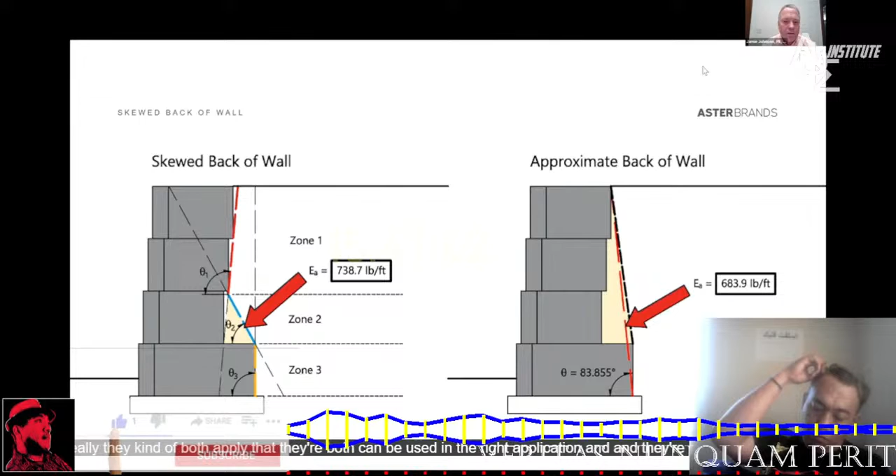So really, they both apply. They can both be used in the right application, and they're both included in the book. This is just one example of things specific to PMBs that were included in the book, and it's kind of why we wrote it in the first place.